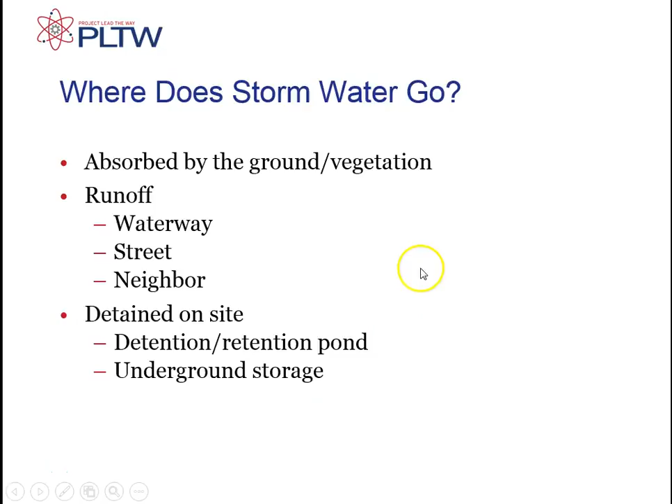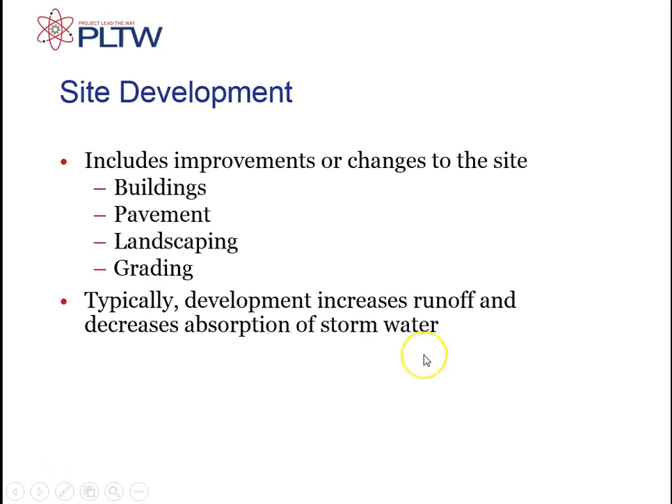So where does the stormwater go? We already saw this on those pictures. Absorbed, running off, or we detain it in a pond or a storage. All of these items affect how much runoff we're going to have. And we've already talked about it. When we develop, we increase runoff and we decrease absorption. And, guessed it, codes and regulations tell us what we need to do. We need to protect the environment, protect the property because we don't want the water running off, and reduce impact on our storm drains. We don't want flooding downstream.

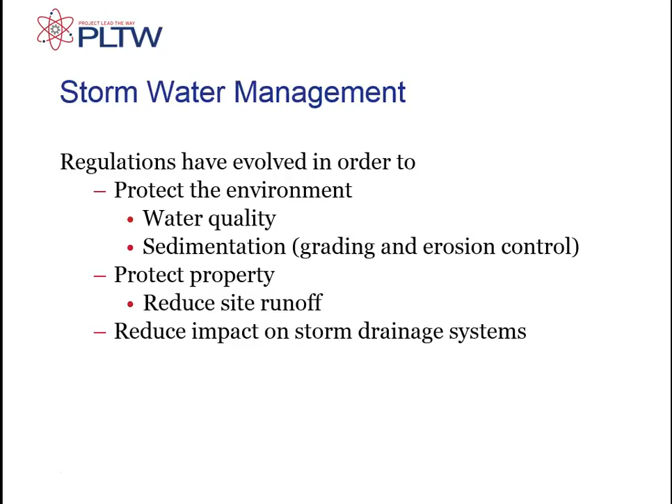Things that are important that we're going to use in our formulas. Rainfall intensity. Is it a light shower? Is it a heavy shower? 1 inch of rain over a week is almost no problem because it's going to be absorbed. 1 inch of rain in 1 hour is going to cause a lot of runoff. Soil type. We're actually going to talk in depth about soils in our next section, but what kind of soil you have makes a difference on how quickly the water will be absorbed.

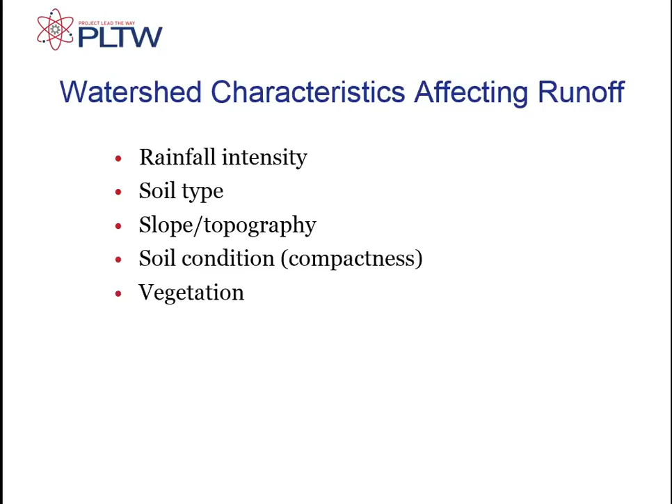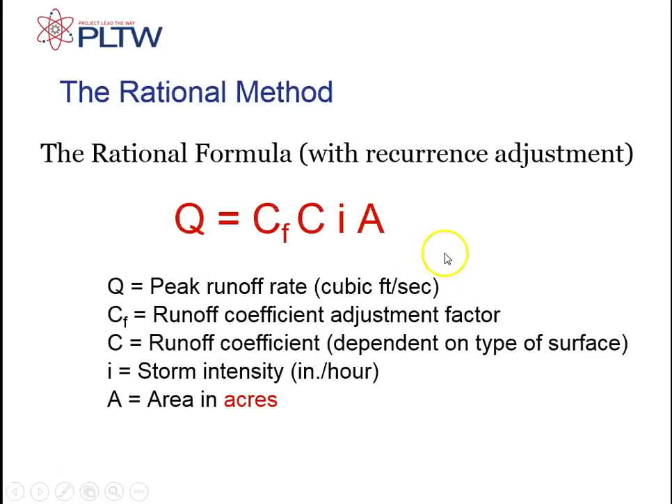Slope should make sense. If we're talking about a steep slope, the water's going to run off versus if it's very flat. Soil conditions and vegetation. Is it lawn? Is it natural plants? Take a second, read through these, take notes if you need. So this is the formula we're going to be using. Take a minute, write this down, and write down what each of these means.

So the first one is based on what kind of storm we have. So if this is like a 100-year storm, CF would be 1.25. If it's a 1-year storm, it would be 1. Now when I say a 100-year storm, that's how they classify different types of storms and weather. A 100-year storm says that on average, there's just a 1% chance that we're going to have this storm in any given year. Or on average, we'd say over 100 years, we'll just have this storm once. It doesn't always work out that way due to statistics.

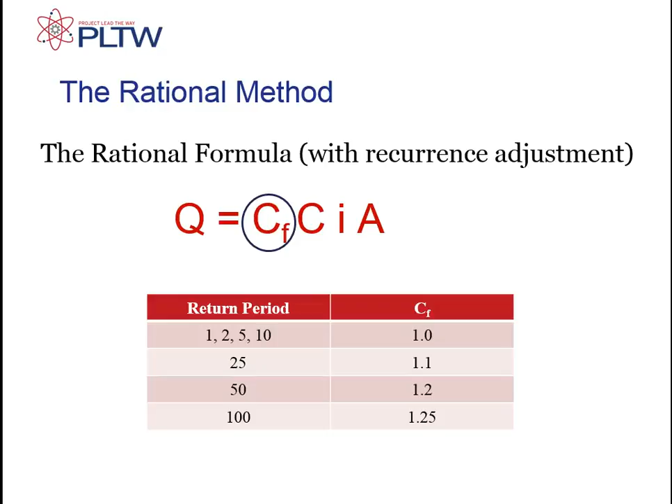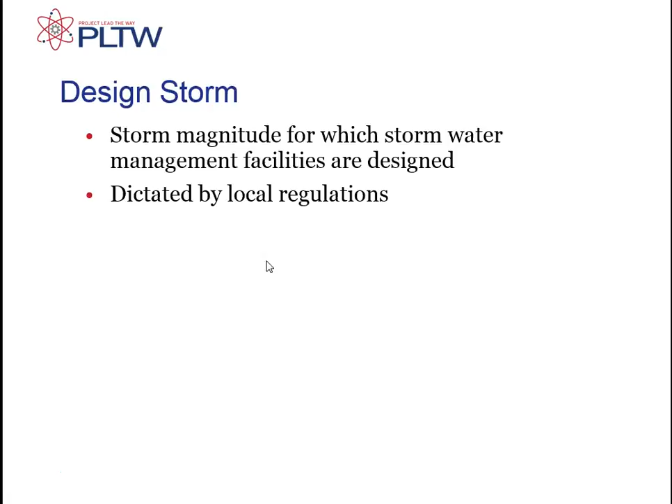Again, I mentioned intensity already. It has to do with how much water we get and how quickly. We start with the design storm. Code tells us what kind of storm we need to design our drainage system for. And in any problem or any real life situation, you'd be told what kind of storm to design for. Often it's just code that's telling us this information. And this is what I just said a second ago.

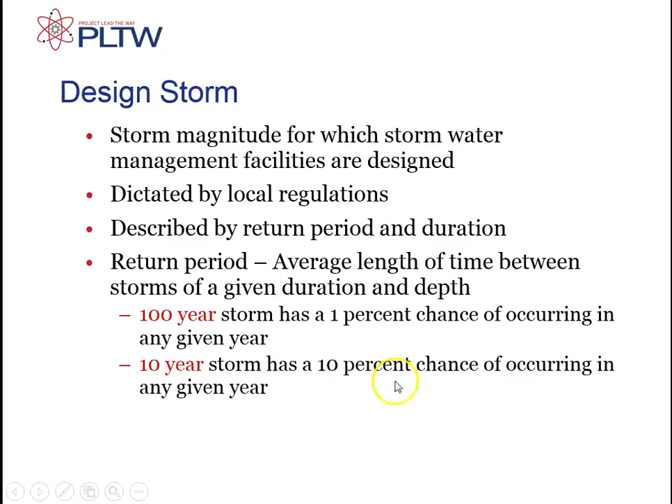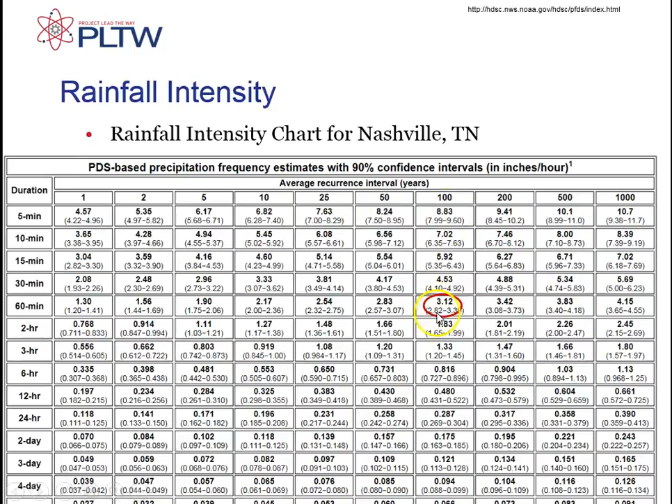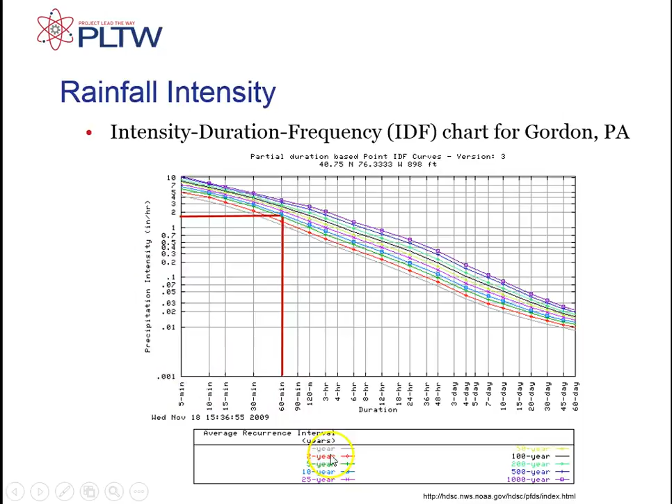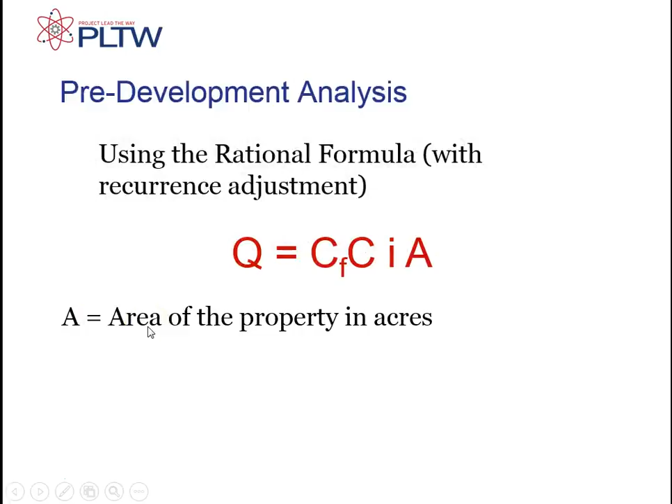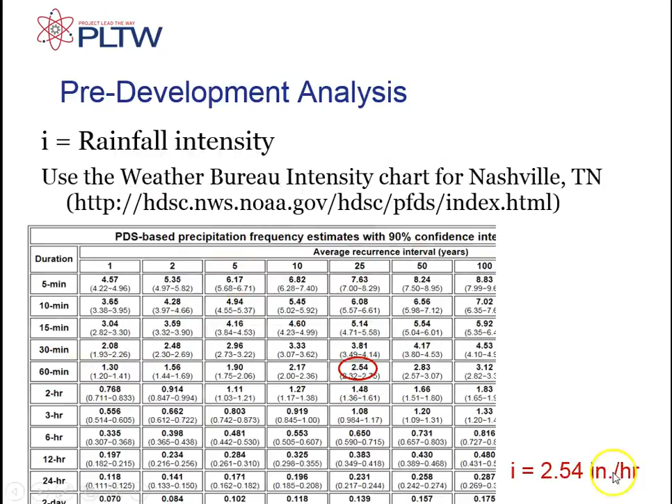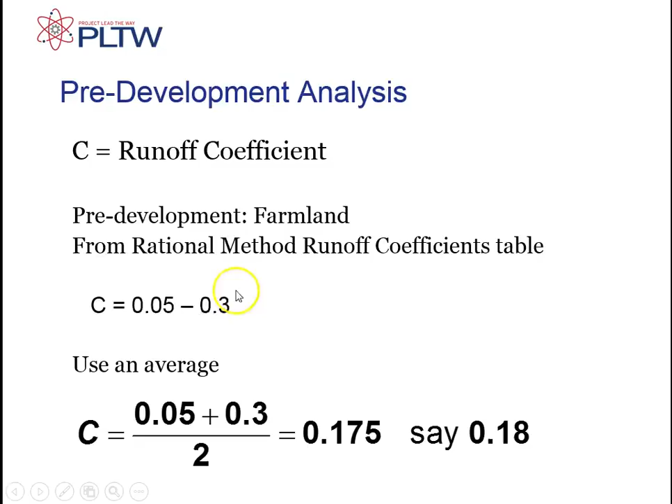Here's our formula. A is the area of the property in acres. Do remember you have to use the area in all of these in acres. Intensity we get from here. We're talking about a 25-year storm in 1 hour. So here's our I value we're going to plug in. C is our runoff coefficient, and we originally had farmland. You're going to read this from the table. And we find that this gives us 0.05 to 0.3, and our problem said to use the average of these numbers. Add them up, divide by 2. Sometimes it says to use the most conservative number, which would be the biggest number. Sometimes it says to use the average.

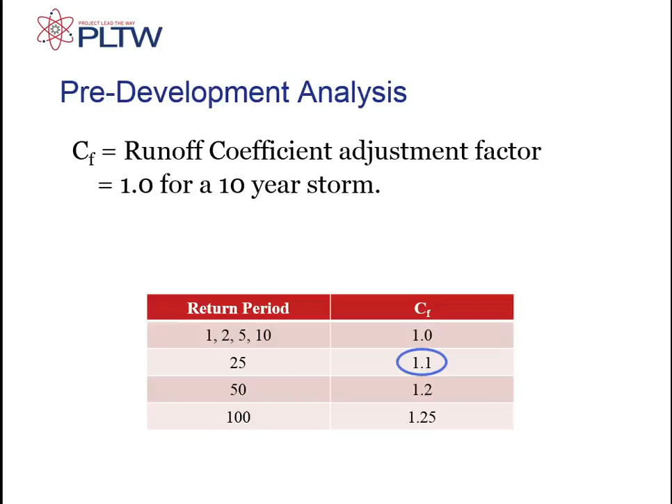It was a 25-year storm, so we see 25-year storm is right here. That's our CF. So we plug all these numbers in here. We plug them all in, multiply. This is cubic feet per second. That's the flow from our storm, 1.5 cubic feet per second.

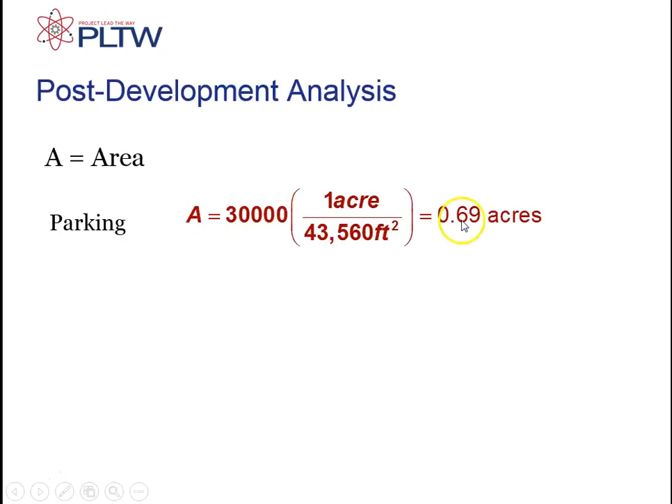Now after we've made the development, we need to calculate each different area. Parking, change the 30,000 square feet with our conversion factor over to acres. Farmland, what we left as farmland. And then we have intensity, same as before. Runoff coefficient for farmland, we look it up on the table. This is the same number we had from before. And the asphalt, we're going to use this one.

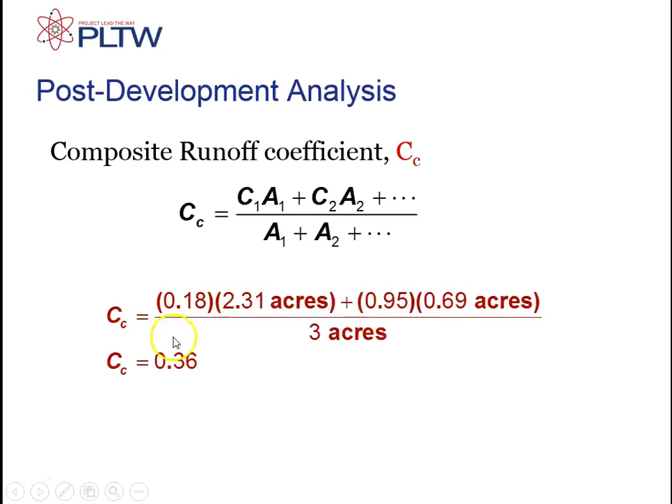Now when you're doing a section that has different kinds of areas, we have to use this formula. If I only have 2, I use this one where I multiply C times A plus the other C times A. If I had more terms, I would keep going plus C times A, plus C times A. On bottom, I just add up the total area we're talking about. And remember, please excuse my dear Aunt Sally, multiply on top before adding. Do the entire top before you divide by the bottom. Here's your C number for this one. Plug those in here to get your post-development analysis. I'm not going to explain this alternative method, but you're free to look through and see how that works.

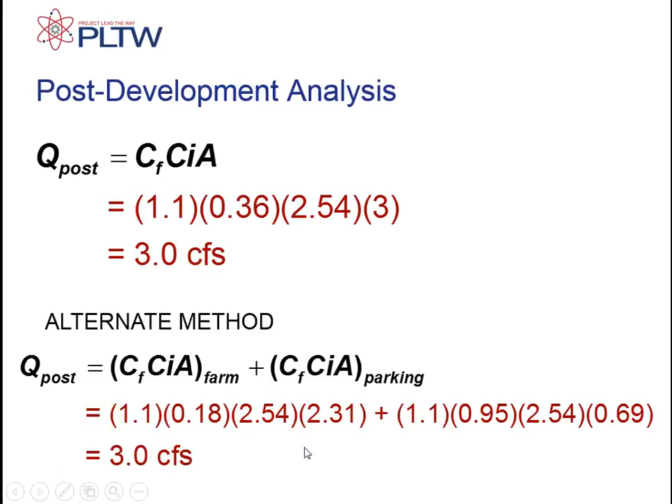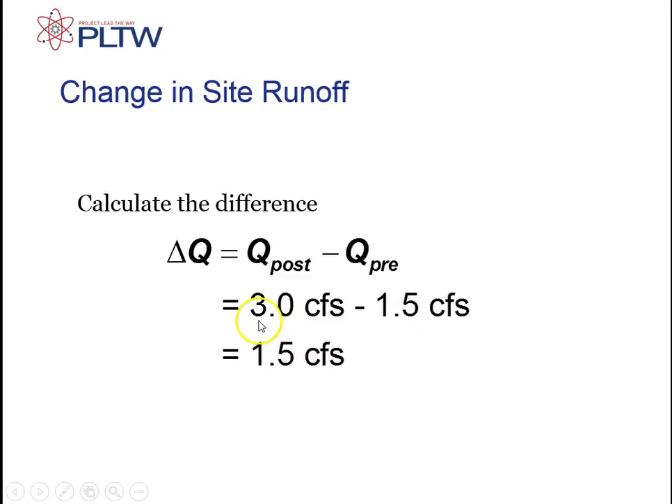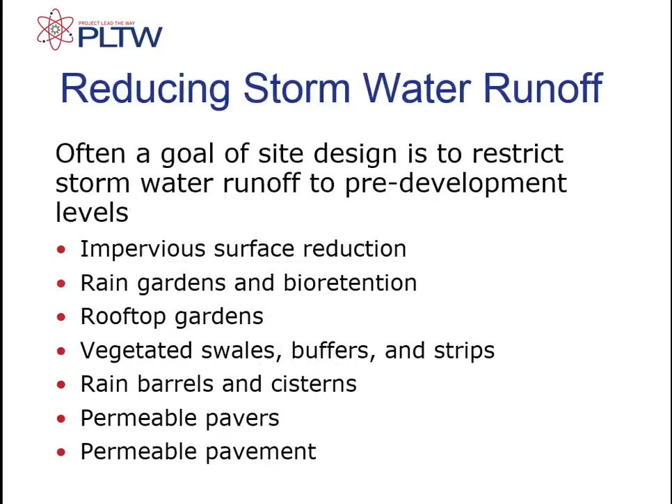Then to find the difference, well, the difference just means subtract. Post minus pre, big minus small, and we see that the difference is an extra 1.5 cubic feet per second. In fact, we've doubled the amount of runoff with our development. Again, these are the same ways we saw in the previous video. Remember our LEED points that we had back when we talked about residential? Here's some of those. Read over them.

And that's the end of this. I've given you a packet to use. It has the tables you're going to need, as well as a step-by-step worked out problem that you can use as an example as you work through your activity.